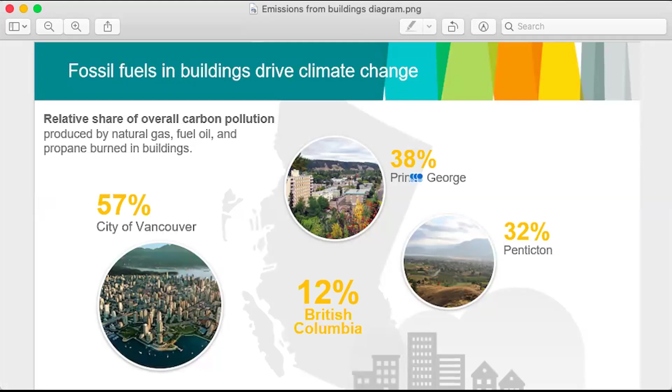Fossil fuels in buildings contributes about 12% of emissions. Fossil fuels in buildings is either the biggest or second biggest source of carbon pollution. In Penticton and other interior communities, buildings produce roughly 1/3 of all the emissions, while in Vancouver it is more, it's over half, of course, because it's much denser. And you can take that down now, thanks.

While newly built sustainable dwellings often grab the headlines, it is the buildings that are currently standing and that will be standing for many years to come that are some of the lowest hanging fruit.

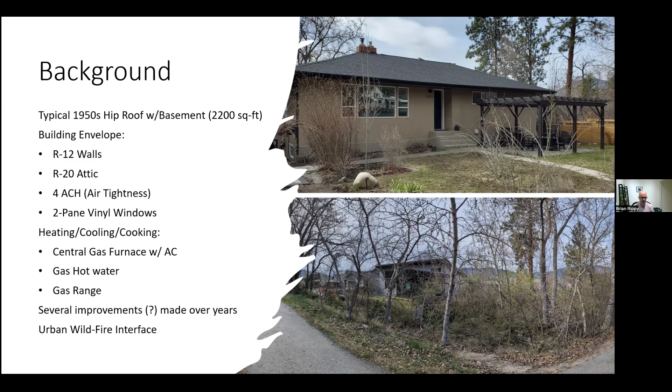One thing to note about this particular location here in Penticton is there's 4 unmaintained city park lots next to us. It's always been a fire concern of ours. In addition, we're kind of on a bit of an urban wildfire interface corridor where a creek comes down and there's riparian zones on both sides. And so, we know from recent years in British Columbia that urban wildfire interface is something of note, and has been on people's radar recently, and rightly so, because of the concerns of forest fires and the increased frequency and intensity of them that we're seeing here in this part of Canada, and elsewhere for that matter.

So getting into the project goals, first and foremost for me was really being able to do a deep energy retrofit, being able to reduce the amount of energy that we used in this house by at least 50%. But also part of that was seeing if we could take an existing residential building and meet the newer BC Energy Step Code 5, which is the highest threshold.

For those of you that aren't from BC or may not be familiar with the BC Energy Step Code, essentially it's a code that provides an incremental approach to obtaining energy efficient buildings that really go above the base requirements of the previous BC building code, and it provides a pathway to ensuring that all buildings province-wide are net zero ready by 2032 to meet our climate targets. Another part of my research was using modern technology to sort of optimize the deep energy retrofit process. And I'll talk a little bit about that in a minute.

Decarbonization was also a priority, and that term basically refers to removing or reducing the amount of carbon dioxide output into the atmosphere. And from a homeowner's perspective, that can be achieved by simply switching to low carbon energy sources. For us here in BC, it would be switching from natural gas to electricity, and the vast majority of our power comes from hydro. Climate proofing, again, talking about that urban wildfire interface.

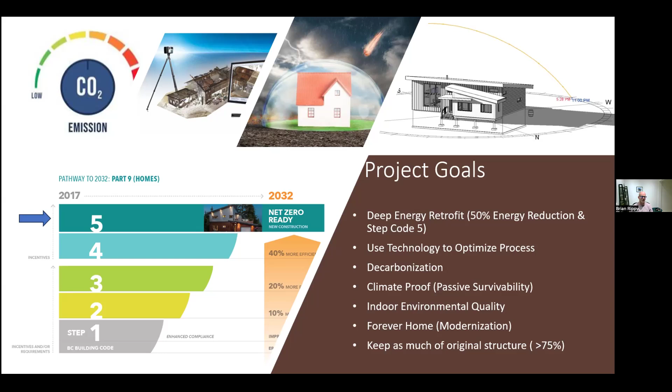Some of the strategies we employed were, let's talk about design teams, making sure that we had an integrated project delivery-ish type technique. And by integrated project delivery, what I'm really talking about is everybody that's involved in that process, making sure that the occupants, the designers, the contractors, even the energy advisors, and when possible, some of the more important trades are involved in the conversations at the design level phase. This is your opportunity to recognize synergies, and to reduce some of the inefficiencies of a typical way you deliver a project.

And then we use newer technologies. We use a 3D Faro laser scanner. For those of you that aren't familiar with this, think of traditional surveying equipment that you would set up on a tripod, but in this case, this laser scanner sets up on a tripod and quickly can scan two sides of a building. Within a matter of an hour, you can do a 3D scan of the entire exterior, interior, to within extremely fine tolerances. It shoots 3D points every few millimeters, and then we can quickly export that into a 3D building information model.

So right away, you have this great model that's way more accurate than pulling tape. It's in 3D, so you can use 3D software to make changes to that. And it has a huge advantage when we talk about deep energy retrofits. And so those two things, both 3D laser scanning and building information modeling, while widely used in the commercial building industry, we haven't seen as much application on the residential side, in this case, the deep energy retrofit side, and it has huge promise.

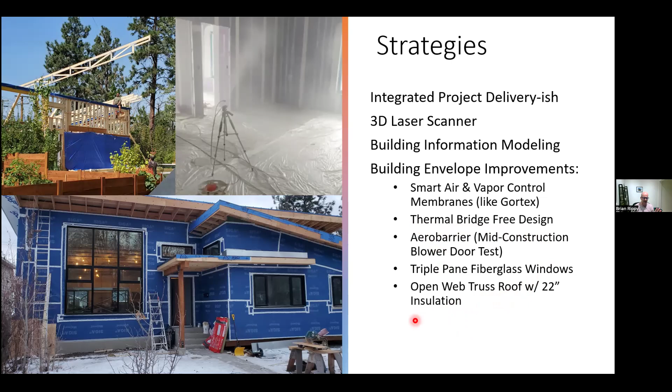So some other strategies with the building envelope. We use mineral wool, both in terms of cavity insulation, but also in terms of exterior insulation. I love this product. The fact that it's made locally here in BC is a big reason why. It's also a byproduct, and no bugs or termites or anything want to eat it. It's hydrophobically stable, so it can get wet and dry out and not deteriorate. It's fireproof. You can take a blowtorch to this, and it will take an extremely long time to burn. And we have 5 inches of this mineral wool rigid board on the outside.

And in addition to that, in some places we use a sheathing product. We did have an addition, around 300 square feet. And instead of traditional sheathing material, we used this wood fiber sheathing material that's produced in Quebec. And unfortunately, it's the only place in North America that I could find that it's produced. They do produce it in Ireland and Europe, which is funny because it comes from a softwood product, and we in BC are some of the largest softwood areas in the world, yet we don't produce any of this wood fiber sheathing. Just an idea for anybody out there.

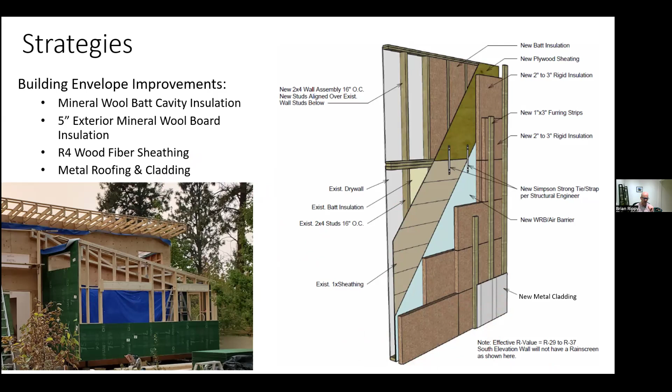In addition, as part of that whole resiliency and passive survivability, we use metal roofing and cladding on the exterior. All of the exterior cladding is metal. Part of it is because it's fireproof. The other part is we have to use really long fasteners to go through 5 inches of rigid insulation. And we want to make sure that whatever that cladding material is, it's light, so we don't get deflection in those fasteners. Overall, my envelope went from an R12 to somewhere between R30 and the high R30s, depending on what aspect of the building you're on.

Additional strategies when it came to decarbonization and energy efficiency was simply switching out my gas equipment. So we went from a gas furnace to an air source cold climate heat pump, actually significantly smaller than what you would normally have for a house this size. We switched over from a gas hot water tank to a domestic hot water heat pump. All our gas appliances were switched over to Energy Star certified electric appliances. Essentially, this home is net zero ready. We're ready to install solar panels after I've had about 2 years of real world operational data. I've got one so far, and we'll be ready to go for that.

In terms of indoor environmental quality, it was really important that we maintained healthy air in this building. I chose to install an energy recovery ventilation system, or ERV. Some of you may be familiar with an HRV, heat recovery ventilation system. I'll explain why I chose this in a second. But basically, either one of these systems is a way of getting clean air into your building, exhausting stale air, and maintaining as much of that energy, that conditioned air, as possible. So there's an energy recovery element to it.

And of course, whole house HEPA filtration. Basically, with my central air system, I've tied on a filtration system that is HEPA rated. It's what you would need to remove the small particulate matter that comes with wildfire smoke. And so during the summer, when it's smoky out, air quality advisories tell us to go indoors, shut your windows, and turn off your HRV or ERV system, because it does bring in smoke.

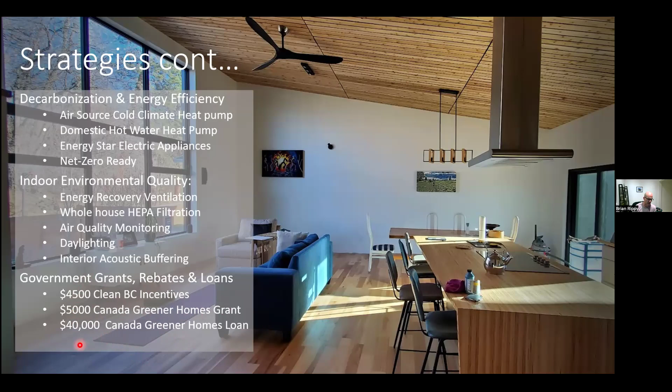And we were able to take advantage of these government grants and loans, totaling close to $50,000. And this is not because I'm special or anything like that. It's just because I made myself apprised of the information and the process. And I know that I'm not the only one that's done this.

So getting down to the results. The original target was that deep energy retrofit. And so here we have 2 EnerGuide ratings. You guys that have had an energy advisor come to your house and provide an energy audit should be familiar at least with these 2 ratings at the top. So pre-retrofit, my house used 95 gigajoules a year. And this is for basically 2,285 square feet of floor area.

Post-retrofit, and this is based on both performance but also prescriptive factors, the performance factor being the air change. So again, pre-retrofit, I was at 4 air changes and 95 gigajoules per year. Post-retrofit, we got that down to 45 gigajoules per year. And what I was really happy with was down to 0.98 air changes per hour. This is great. I was extremely happy with that turnout.

Hitting one, for an existing building, I thought was going to be really challenging, but I think having this process really helped us realize that goal. And I think that we made things more difficult by having more extensive renovations that didn't relate necessarily to the deep energy retrofit. We did add volume. We pushed our roof up, added a new roof. We also had the addition as well.

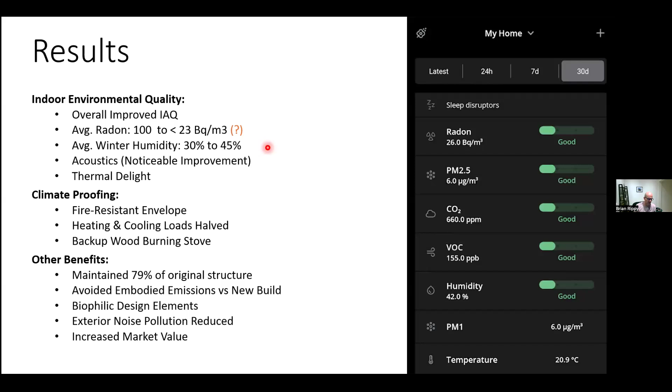Exterior noise pollution has dramatically reduced. We used to hear people walking on the path at night and getting up to whatever, and now there could be a train wreck outside if we had trains there, and we probably wouldn't even hear it. And then, of course, there's always the benefit of increased market value when you do changes like this as well.

So, a project like this does not come without lessons learned. And so these are some takeaways that I have from this project. And one of those is existing buildings may not meet current building code requirements, right? So when this house was built in the 50s, the setback limits between buildings or limiting distance between openings of buildings, these things weren't necessarily in place, or at least as stringent as they are now. So that's something to keep in mind.

And we had some challenges along with it. But I find that if you start conversations early and often with code officials, they're excited that you're doing projects like this. They want to help you if they can. Part of them being able to help you is, again, having those early conversations, not taking an adversarial approach either. Consider them a member of your team, and then you doing the homework as well, understanding the intent of code.

Because often when a building code official feels like they have to basically tell you something contrary to what you'd like to hear, if you can prove that you're meeting the intent of the code, then often there is some daylight. And this happened quite a bit where I had a building code official that was happy to kick it up to the next level building code official. And we didn't always see eye to eye on some things, but for the most part, I was able to navigate that by doing my homework, familiarizing myself with what aspects of the code they were concerned with.

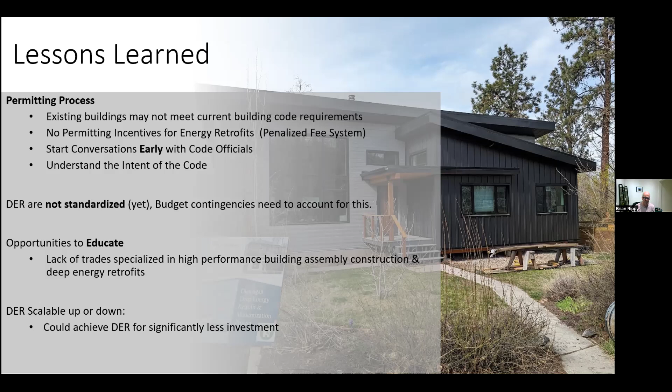Before I turn over to the next slide, again, this is for what we did with this project. Not everything we did was based on energy efficiency, and if it had been, it would have been significantly cheaper to do so. So one thing I'd like to say also is timing is everything. I did this project as part of a sabbatical. And from the time I found out that I was awarded my sabbatical till I needed to basically start design was only a few weeks. So things had to happen quite quickly for me. In hindsight, I would have loved to have had more time, but I only had about a year to implement

this project. And so the original cost estimate that we had, myself alongside a colleague of mine that actually has a design build firm and teaches estimating in our program, came up with $270,000. Unfortunately, as any of you that know about what happened in the first half of 2022, it was probably the worst time to be in the construction industry in terms of sourcing materials and pricing, because we found that across the board, construction material costs went up 30% in 6 months. And that I was not prepared for.

And not only that, but there were significant supply and demand chain issues. So I was constantly finding myself having to pivot to different options or materials that often came at a higher cost or premium because they were the only things that were available. And some of the approaches that I wanted to do with my project, I was unable to do as well. But I will talk about some of those things that could have reduced the cost. And ultimately, the actual materials and labor cost came to $360,000. That doesn't include any of the grants or government retrofit loans that I talked about.

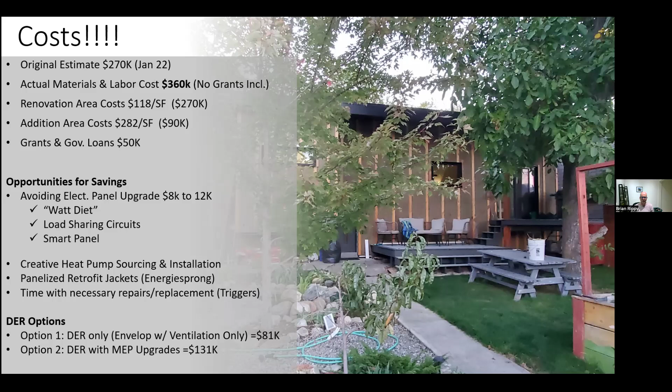So I guess the next thing I noticed in terms of the comments was people are kind of confused on how do you start this process. It seems like a lot of information. It can be overwhelming. And luckily here in BC, we have energy advisors, and you can call them up. There's several firms that operate throughout the Okanagan and throughout BC, and actually in Canada for that matter. They have the equivalent in

the United States as well, and they'll come to your house and they'll basically go through and they'll do a blower door test. They'll tell you where your house is leaking. They'll give you a report and basically outline what are the priorities. Where are you going to get the most bang for your buck in terms of where you put your money to make your house more energy efficient.

But taking a step back from that, I always like to advocate for a whole systems thinking approach, whether it's a new building or existing building. And that really starts with basic building design. And in that case, that's where we prioritize things like insulation and making sure that we have a building envelope that doesn't leak where it shouldn't. And looking at all those passive components as well.